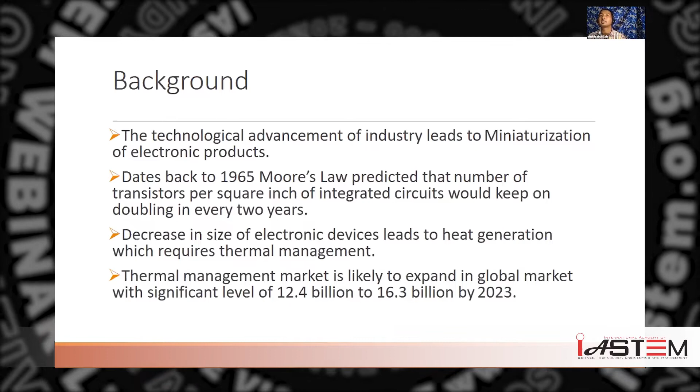Let's talk about the effect when electronic size decreases. As electronic size decreases, there is heat generation, which requires large thermal management. According to BCC Research on semiconductors in 2019, they predicted that the thermal management market is likely to expand globally from 12.4 billion to 16.3 billion by 2023. Now let's talk about the literature review.

Masip experimentally investigated the turbulent flow over a cubical block exposed to a cross flow and impinging jet, where they concluded that the Reynolds number ratio determined the drag produced on the jet and its deflection from its geometrical axis due to the channel stream. Ritunesh et al., a paper also co-authored by me, studied heat transfer enhancement using multi-inlets to the heat sink, which mitigated the temperature non-uniformity and increased heat transfer.

Nemdili Saleha numerically investigated the heat transfer efficacy by changing the shape of the cubical block to a chamfer shape, concluding that with the chamfer on the top of the cube, the heat transfer rate increased from 2.7 watt to 3.5 watt. In a similar way, Arquis et al. made a numerical study of heat transfer and flow over a heated block with the help of a jet from the top.

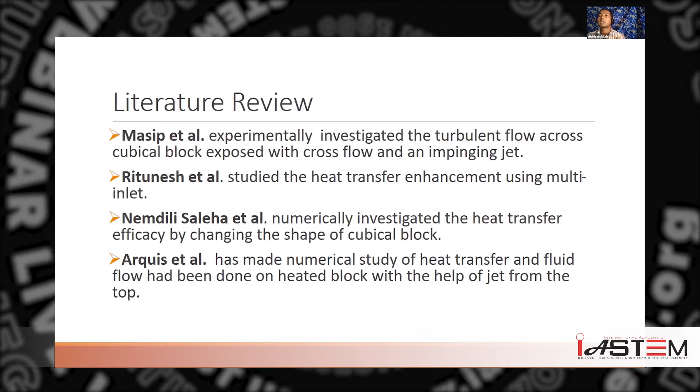Now, motivation and objective. New cooling methodology needs to be developed for the safe operation of equipment. Much research has been done on air cooling, but very few use heat transfer enhancement techniques. Due to free availability of air and simplicity of design, there is a scope for thermal management. The objective of this study is to validate the numerical methodology developed with results available in the literature, and to investigate the effect of design modification of a cubical block at two different Reynolds numbers.

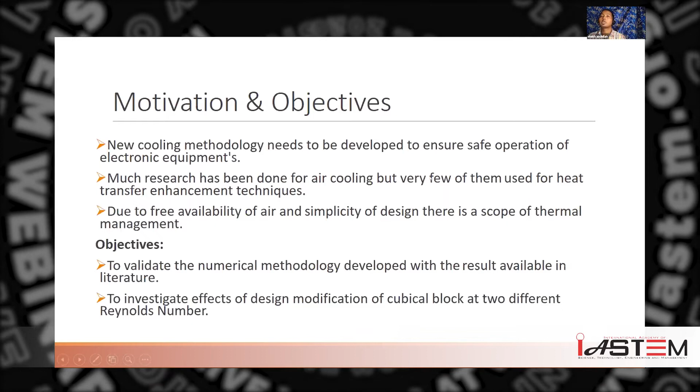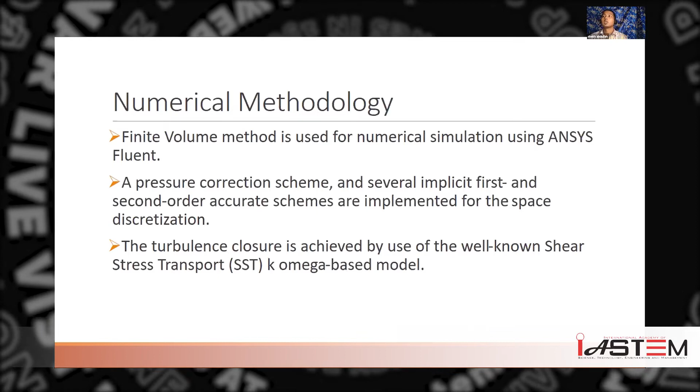In our study we assume that gravity is neglected and radiation heat transfer from the surface is also neglected. For the numerical methodology, the finite volume method is used for simulation using ANSYS Fluent, with a pressure correction scheme, and implicit first and second order accurate schemes are implemented for space discretization. Then a turbulence model is used.

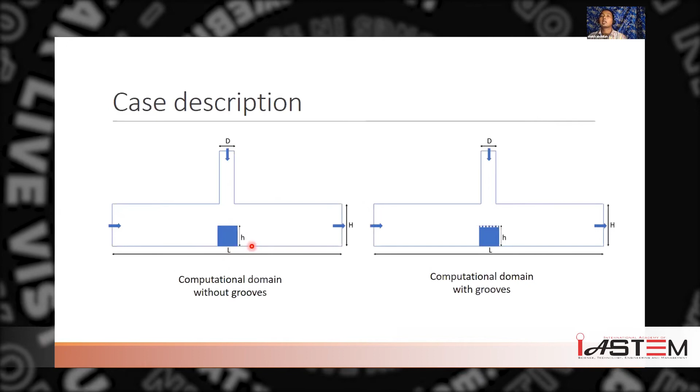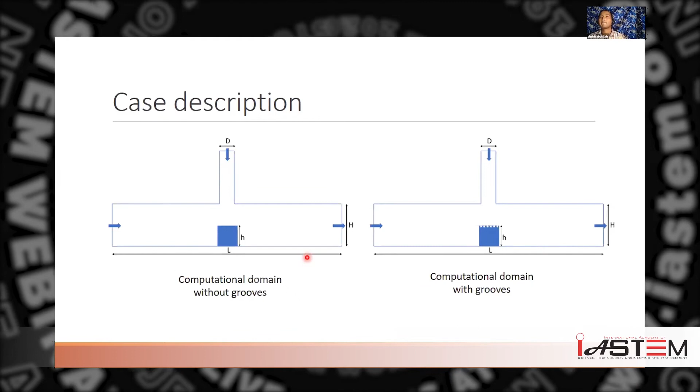Here is the case description. As we can see, this is the channel inlet. This is the cubical block we are trying to cool using the jet from the top. This is the computational domain without grooves. This is our computational design with the grooves.

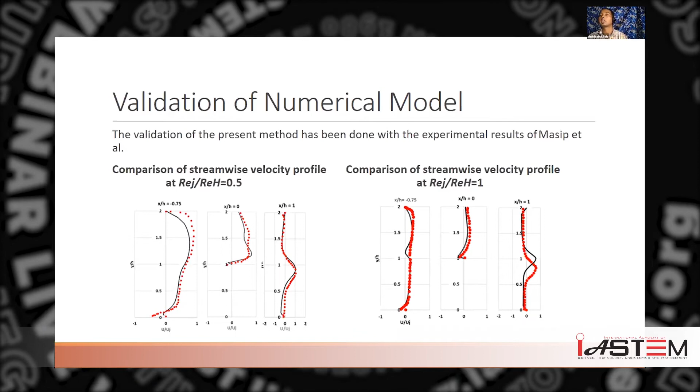Now we would like to validate our numerical model using the experimental results of Masip et al. Two comparisons have been made at two different Reynolds number ratios, and it can be seen that there is good agreement between the experimental results and our numerical study. There are certain differences, due to experimental error and the limitation of the turbulence flow model.

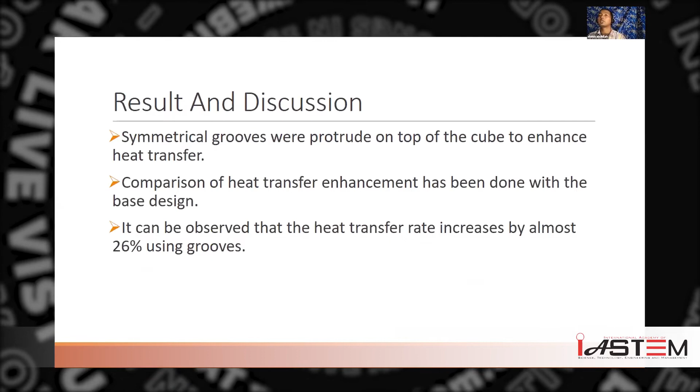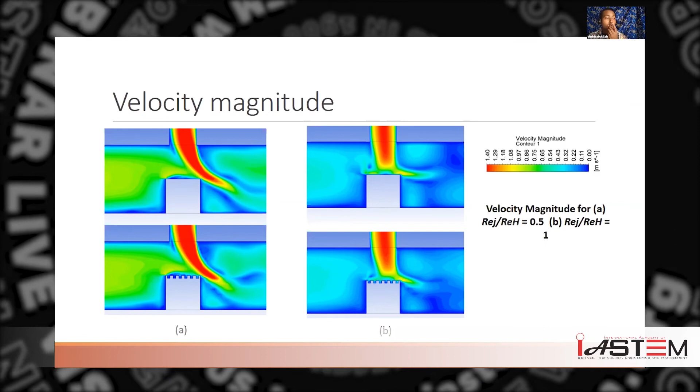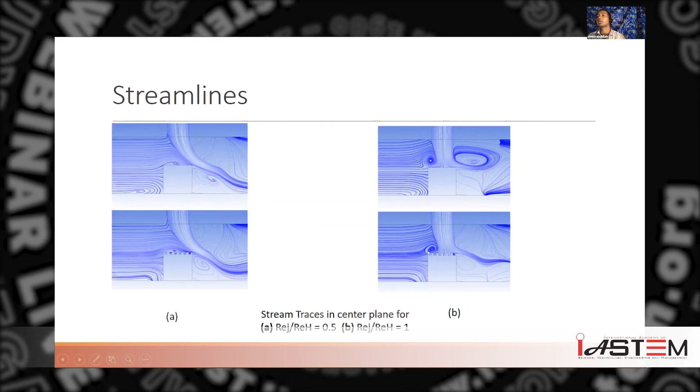Now we talk about the streamlines. As we can see, without the groove there are two wake regions on the top of the cube, but by using the grooves, there is a reduction of one wake region.